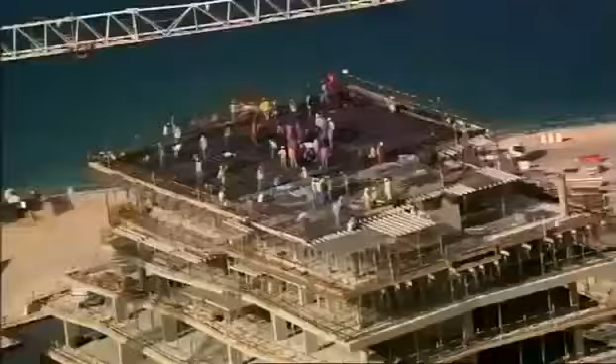Abu Dhabi, the richest city on the planet. It wants to join the City Super League and is undertaking an incredible transformation, building this extraordinary skyscraper, Aldar HQ. Nothing like it has ever been attempted. It'll be a race against the clock. Will this megastructure push even Abu Dhabi to the limit?

Abu Dhabi is in the midst of a construction boom. It's the largest of 7 sheikdoms known as the United Arab Emirates. Its capital, also called Abu Dhabi, is the richest city on earth. Its ruler, Sheikh Khalifa, has a cool $875 billion in the bank and an audacious spending strategy to match. He wants to transform the skyline and compete with the international elite of London, New York and Hong Kong.

But this is not the first time the Emirate has stood at the crossroads. Just decades ago, Abu Dhabi was a desert backwater, until the discovery of oil in 1958 brought unimaginable riches to its ruler, Sheikh Zayed. As the petrodollars flowed in, he converted the shell houses into high-rise, and the traditional way of life was swept away.

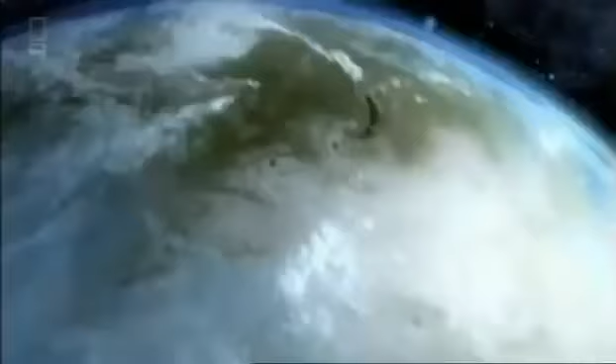To put Abu Dhabi on the world map, fledgling property developers Aldar plan a whole new micro-city, Al Raha Beach. It's an ambitious proposal. At 11 kilometers long and almost a kilometer wide, this city on the sea will be the biggest project ever attempted in Abu Dhabi's history. Mohammed Al Mubarak is in charge of delivering this audacious development. The vision of their highnesses and the vision of Aldar was to create this almost mini city where people can live, study, play, and work in one destination.

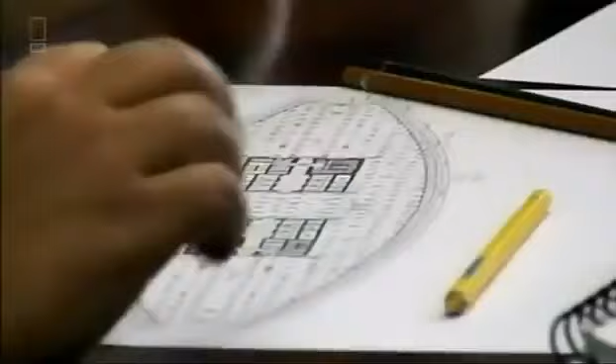Al Mubarak must attract investors if Al Raha Beach is to succeed. So to launch the project, he commissions a signature skyscraper. Creating an iconic structure on Al Raha Beach was of vast importance on basically putting Al Raha Beach on the world map. Al Mubarak sets Lebanese architect Marwan Zgheib the task of designing an icon that raises the stakes even higher. The building will become Aldar's headquarters in the heart of their colossal development.

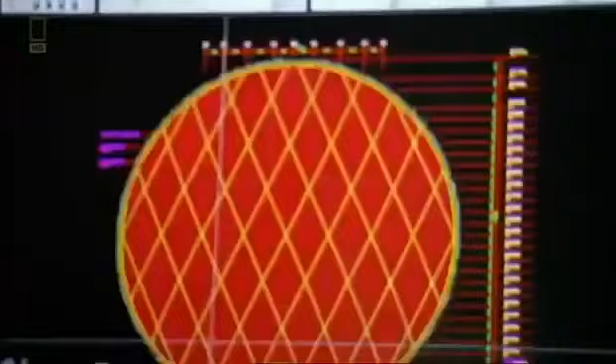But creating something new in a land where the iconic is the everyday won't be easy. Neighboring Emirate Dubai has taken center stage with a number of headline-hitting projects. The world's tallest skyscraper, Burj Khalifa, the Palm, and the World, and the emblematic Burj Al Arab. To stand out from the crowd, Zgheib knows he must redefine the extraordinary. Simple can be powerful sometimes, and especially in architecture. You can see it since the pyramids of Egypt. Most of the iconic buildings are very simple buildings.

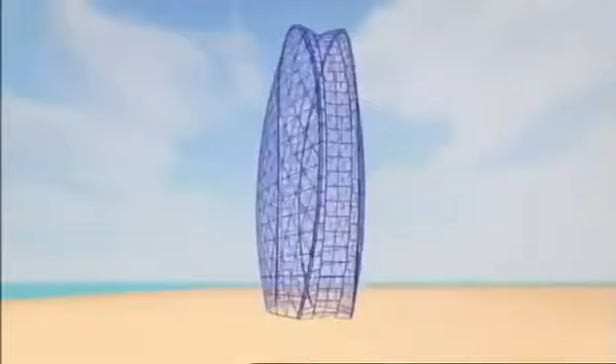But it isn't until Zgheib is relaxing on a plane that he has a brainwave. But I couldn't sleep, so it was a moment of relaxation, you know. And then the idea came, simply. So I took a pen and I drew it on a sketchbook. The design is simple but daring. A round skyscraper taller than the Statue of Liberty, with a curved glass skin covering the area of 4 football fields. To be honest with you, the moment I imagined it, I knew it was a winning concept. I knew it was something different.

In fact, the design is so unusual, Al Mubarak initially doesn't know how to react. When I first looked at the MZ design, I was a bit confused in the beginning, to be honest with you. I felt like I was looking at a comic. I felt that this was a flying saucer and basically it landed on Al Raha Beach. And I just kept on staring at it for like another 15 minutes. And after 15 minutes, I just fell in love with it.

Zgheib's design is inspired by nature. 2 giant circular curved walls of glass mirror an open clamshell. Architecture is nothing but imitation of nature. At the beginning, the idea was so geometrical, very pure. It's like a seashell. The seashell has deep meaning for Abu Dhabi with its seafaring heritage.

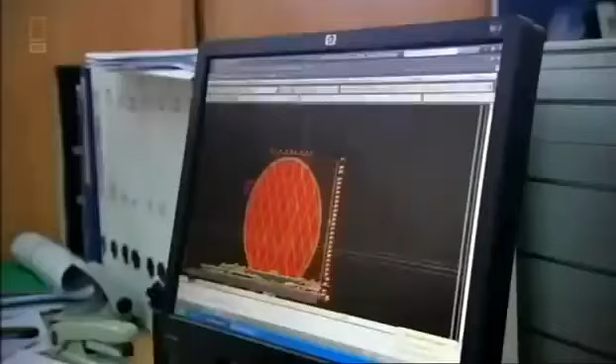But a circular design poses a problem. Just like a coin that stands on its edge, it risks being unstable. The circle must be balanced. So Zgheib turns to some very old-school geometry. The real challenge of the circular facade was to find the 2 points where the building should pose on the ground. And for that, I had to go back to one of the oldest rules in architecture, proportion. When you have a circle, you can divide it into a pentagram.

And that pentagram, in fact, is a representation of the cosmic body of the human being. So you can put a man in that pentagram, the man and the universe. So the pentagram will define the 2 points of the circle where the facade will lay on the ground. And this will create the perfect balance.

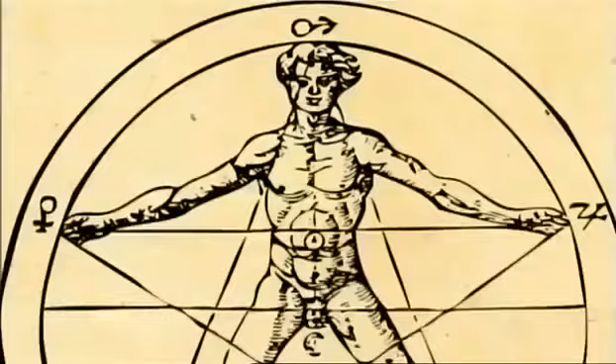It was the same thinking that led 16th century philosopher Heinrich Agrippa to draw man as a pentagram inside a circle, and has helped architects to proportion buildings for centuries. But it's not the skyscraper itself that poses the first major challenge. It's the proposed site. They wanted to show me the site, but all you can see was the sea, nothing but the waters.

Unbelievably, the solid ground required for Aldar HQ does not yet exist. The desired location is 700 meters out in the Persian Gulf and 8 meters underwater. New land must be created. Over 3 million cubic meters of sand must be found. Surely a simple task with Abu Dhabi's endless desert dunes.

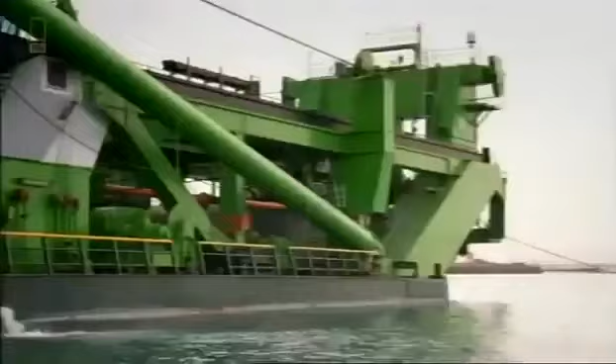But desert sands are too fine to build with. The land would just slide into the sea. Marine sand is needed. Its larger grains help it stick together, creating the perfect base to build on. Dredging sand from the seabed is one solution, but fortunately, the last sheikh has already done the job for them.

Whilst cutting a shipping channel in the late 1970s, Sheikh Zayed created an island of discarded sand. Luckily for the engineers, it's just across the water, so they decide to move all 20 million cubic meters of it. A fleet of cutter dredgers eat their way into the island. These are no ordinary dredgers. It takes an enormous claw layered with 48 reinforced steel teeth to slice through the hardened sand.

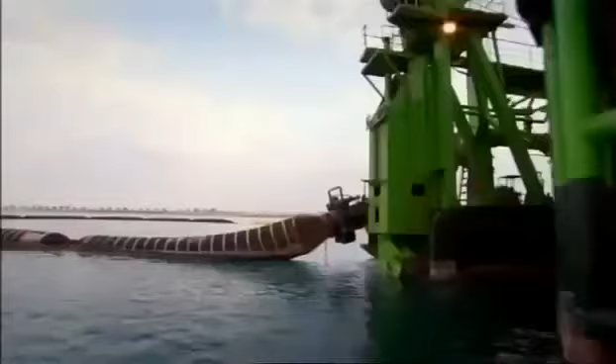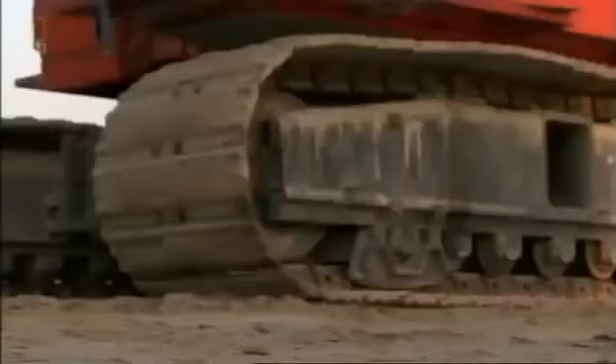The sand is pumped through a floating pipe to the construction site. Here, excavators toil 24 hours a day to flatten the virgin ground. After 8 months, the land for Aldar HQ is fully formed, and with this, the first major problem overcome. Now, engineers must somehow turn Marwan Zgheib's radical design into an engineering blueprint.

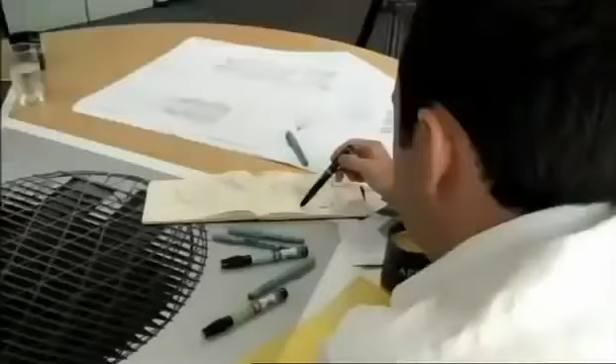Aldar want their skyscraper completed by an astonishing deadline. In just 30 months' time, the eyes of the world will be on Abu Dhabi when it hosts its first Formula One Grand Prix. The racetrack will be on its own designated island, complete with hotels and theme parks. And Aldar are building the lot.

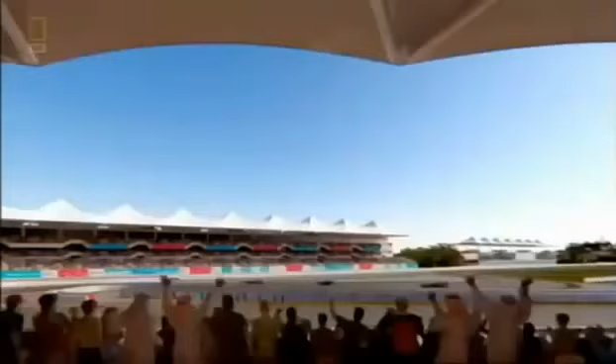The international press and tens of thousands of visitors will descend on the city. It's the ideal opportunity for Aldar to showcase their new HQ. But to stand any chance of meeting this target, the team will have to pull out all the stops. Just 1 month after design has started on Abu Dhabi's round skyscraper, the construction team arrive on site to begin foundation works.

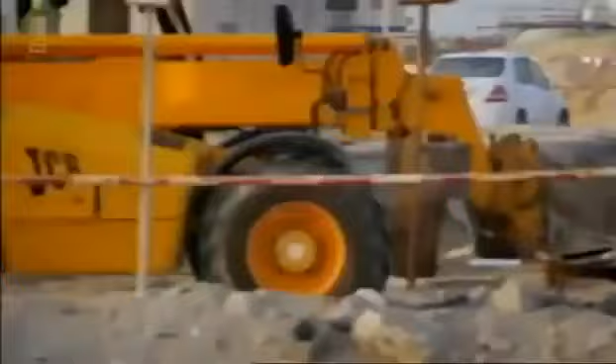For construction manager Miles O'Sullivan, the schedule is a shock. With the design not complete and being told you're going to pile in 1 month, almost crazy. But it's not just the first deadline O'Sullivan has to worry about. Aldar HQ's round curved shape presents an enormous sail-like area when wind strikes. Wind tunnel tests must be done to prove the foundations can take the strain. But the results won't be back until work has already started.

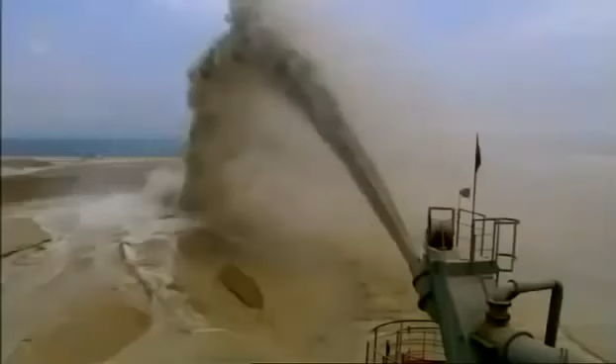Abu Dhabi is regularly hit by high-pressure winds that sweep in from the Persian Gulf. But building Aldar HQ so close to the sea will put the foundations under another kind of pressure. Digging for Aldar HQ is very similar to digging here in the sand. As you dig down, you'll get to see the groundwater starting to surge through the sand. And in fact, it's that groundwater coming through the sand here that's creating the pressure and obviously creating the issues for us when we do the construction.

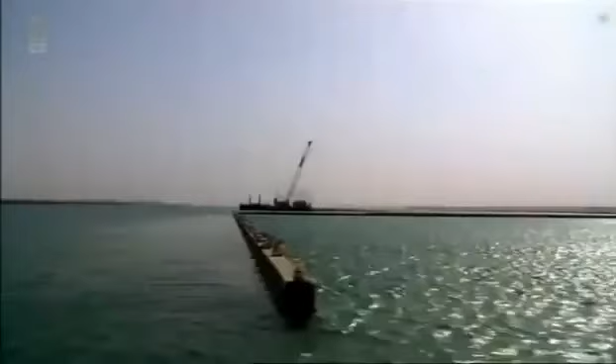The upward pressure of the water and the loose sand pose a problem for foundation construction. Before excavation can begin, the team must build a solid barrier called a diaphragm wall or D-wall. It's a concrete barricade formed of interlocking panels which socket into the bedrock and reach 16 meters below the surface. The D-wall holds back the loose sand and the surging seawater, ensuring the ground inside the barrier can be removed.

These areas here, what are these? Sumps. The D-wall must be built before the foundations can be laid. But with the blueprint above ground a work in progress, the team can only hope that over-engineering the foundations will make them strong enough.

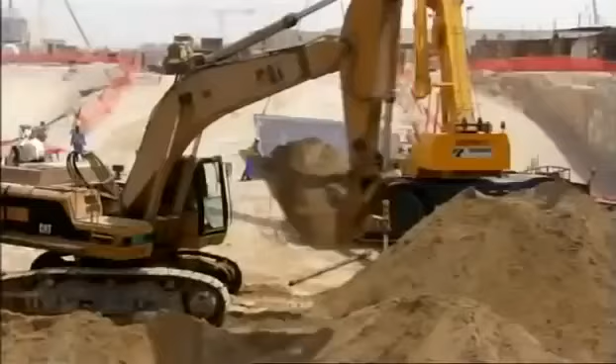The design calls for about 400 concrete piles that work in 2 ways. Half of the piles rely on friction with the ground to secure the structure to the rock and sand below, whilst the remaining piles drive deeper into the rock to dissipate the building's immense loads into the ground. On site, D-wall construction begins. It's the same process ongoing at this Abu Dhabi construction site.

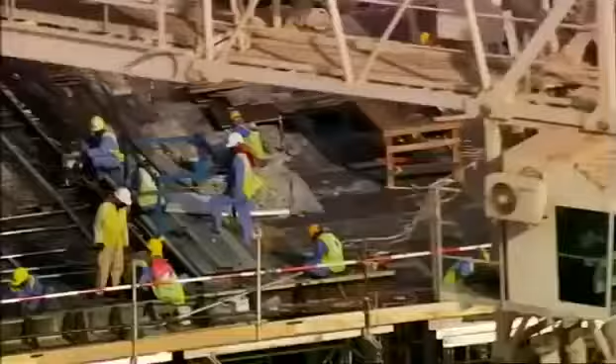Until recently, Al Raha beach was just a vision for Aldar's Mohammed Al Mubarak, but the dream is slowly emerging from the sea. Seeing that land come up, seeing the amount of work and the amount of staff we had on the ground to make sure that was going to be done, that was like watching Rome being built.

The D-wall and concrete piles create a firm foundation upon which to build Aldar HQ. But the force of the sea pushing up through the sand still poses a threat to the skyscraper. A great way of demonstrating the problems we faced at Aldar HQ with the groundwater is in imagining that this bottle here is Aldar HQ.

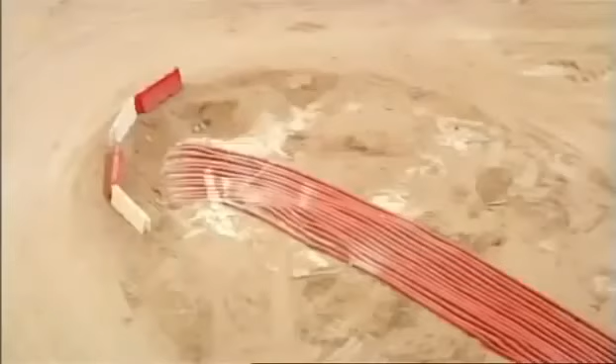And as I push the bottle down, you'll see forces are exerted on my hand. And in fact, that's the groundwater trying to push the building out, trying to push Aldar HQ out of the building site. To keep the site dry during construction, water is sucked out of the sand and pumped out to sea. But that's only a short-term solution.

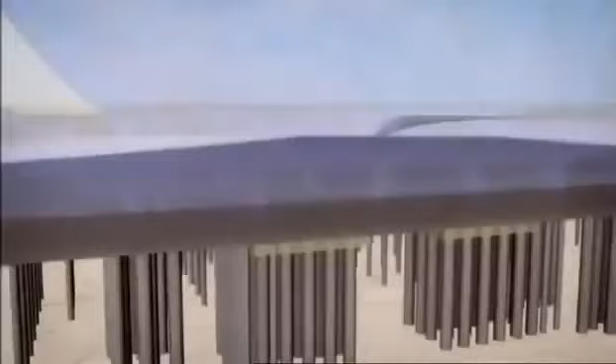To protect this skyscraper in the long term, the team need an extra defense. It's a giant slab of concrete called a raft. It creates a barrier against surging water, stops the piles from punching up through the building, and acts like a snowshoe to evenly distribute Aldar HQ's 59,000-ton weight into the ground.

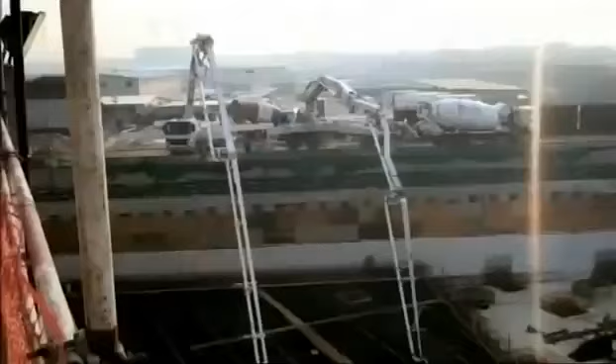Raft construction for Aldar HQ is 12,000 cubic metres of concrete, which is a 30,000-ton structure. It's a huge element. With 2,000 truckloads of concrete to pour, it's a job that continues into the night. But engineers are just getting to grips with the severe forces that will affect the piles.

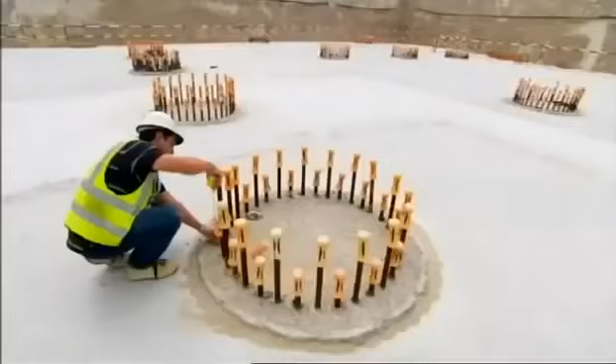The unique shape of the skyscraper will capture wind like the sail of a yacht. There are no guarantees the foundations will be strong enough to cope with the loads. The advanced construction works had to commence so quickly that we didn't have time to do the wind tunnel test. It was important that we did one, primarily because this is a unique shaped building.

Gibbons calls upon wind engineer Roy Denoon in Colorado, USA. He puts a scale model of the HQ through its paces in his high-tech wind tunnel. Right at the start, Craig Gibbons actually called me and said, "We've got something really unusual coming up. Can you take a look at it and give us your first best guess of what the wind loads might be? Give us some guidance on how to get to some loads for the foundations, because this is running on such a fast-track schedule."

Knowing that Gibbons is already building the foundations, Denoon wastes no time in firing up the fans. If the tests reveal the wind loads are higher than predicted, the foundations already in the ground may have to be redesigned. To be putting in the foundations before we could finish the wind tunnel testing, that always gives us a little bit of cause for concern. Denoon is right to be worried.

He knows how high-altitude wind impacts on very tall rectangular skyscrapers. But Aldar HQ's lower height means another type of wind is the threat. When we look at the really extreme wind speeds in the Middle East and in this region, we find that the highest, what we call gust wind speeds, the short events, are caused by thunderstorms.

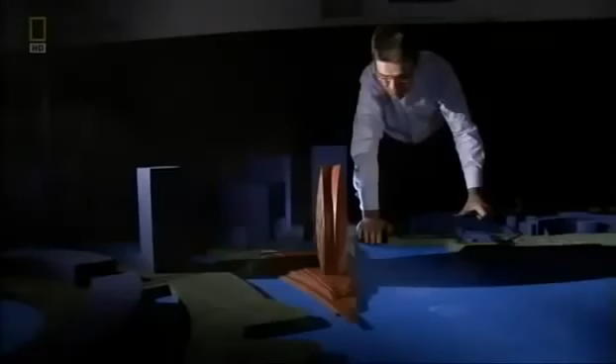Fortunately for Gibbons, it's Denoon's jokes that have no foundation. And I got the results back from the wind tunnel test, and they were within an absolute whisker of my early predictions. And I was just delighted by that. I couldn't wait to get on the phone. They were pretty relieved, I think, because I think they'd been sweating on it a bit. It was a great relief to know that Roy was just winding me up, and that in actual fact the wind loads were very much in line with what our expectations were.

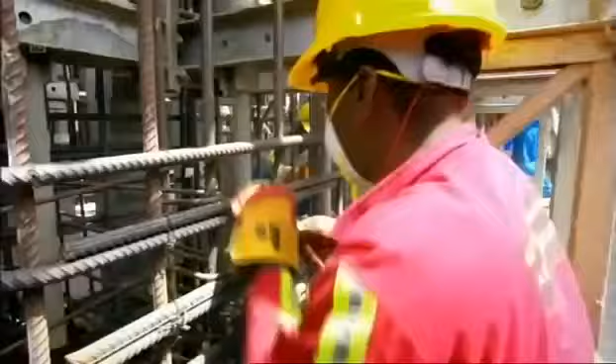The results of the wind tunnel test are great news, but the relief is short-lived. Now the structure needs a super strong backbone or core. But again, conventional building won't fly with this design. For Aldar HQ, one core wasn't enough. We needed 2 cores, in fact, to take all the loads down into the structure. Aldar HQ needs 2 concrete cores for extra stability. The twin spines rise a full 125 meters from the concrete slab to level 23. Reinforced with 6,500 tons of steel, these cores will transfer the loads into the piles. But to channel these forces safely, the concrete must be cast without any flaws.

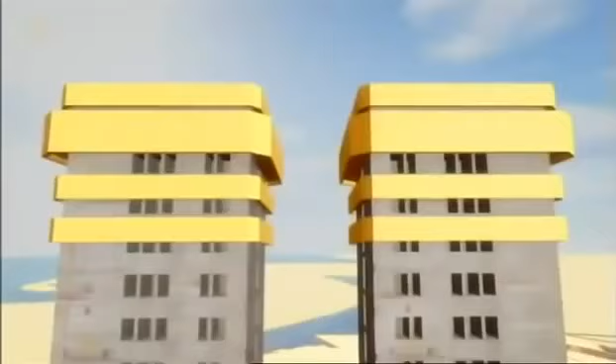They need a way to build the cores as 2 single pieces of concrete. The answer? To slip form. It's a clever way to build big concrete towers. Liquid concrete is poured into a giant mold, which forms the shape of the structure. The mold slowly climbs up the core as it's cast, forming a single concrete tower without any joins. Seamless concrete will ensure the HQ's cores are strong. But these 125-meter backbones must be built in only 6 months.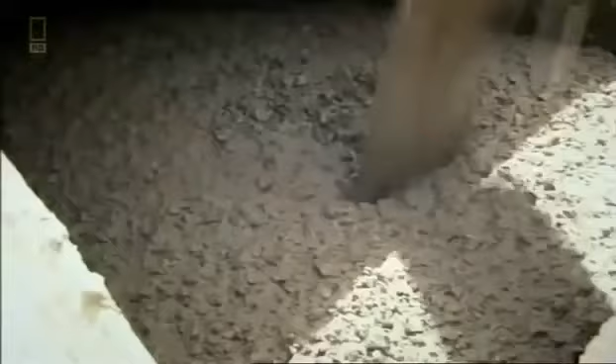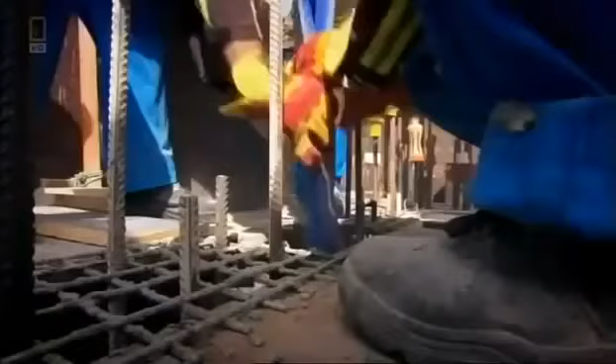It's the same process ongoing at this Abu Dhabi construction site, led by the Aldar HQ team. We are calculating how much per hour we need to climb, and then how much concrete we need to place in every hour. Slip form is fast, but on this schedule it's not fast enough. O'Sullivan has a trick up his sleeve to speed up construction. We set a challenge to both cores, who could get up there first. The teams battle to reach each level before the other. The cores grow meter by meter under a constant cycle. The concrete is released and poured around the steel reinforcement. Hydraulics anchored to the structure raise the mold or shutter so that the next layer of concrete can be poured.

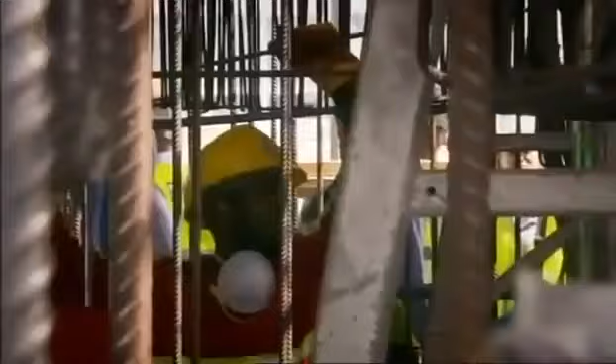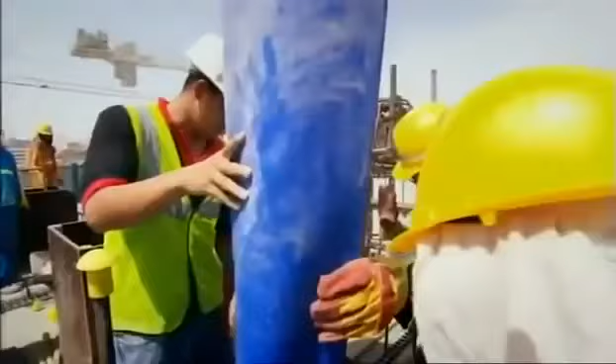The manpower is a key focus because slip forms are very labour intensive. You need to make sure that the guys are on deck, they're there at the right time, they're doing the right works. 4 months into core construction, the 2 teams are neck and neck in the race to the top. Core 1's team leader keeps a close eye on Core 2's height. It's been my benchmark, so if I'm doing better, I'll be ahead of them. There are a lot of pressures. My boss is telling me, do this, go up, go up, go up. But it's good, the pressure is good. Core 2's leader also feels the strain. I'm working 24 hours today. I try to finish earlier than the other core.

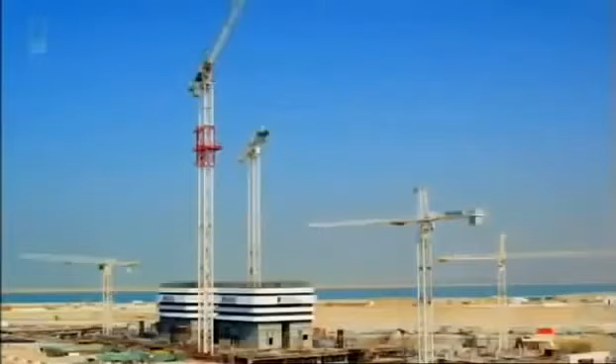Every month, the builders pour enough concrete to fill 1.5 Olympic swimming pools. But the teams aren't home and dry yet. There's still a challenge to finishing. Cores are renowned for going up quickly and sometimes having problems, so there's a lot of coordination effort that goes in to make sure that they do go up on time. We had structural steel elements to cast in. We had crane connections to get right. After just 6 months, the 2 cores are approaching the top. Core 2 is only a meter or so behind, but Core 1 push ahead to victory. Core 1 won the race. It's really good to know that we're on top.

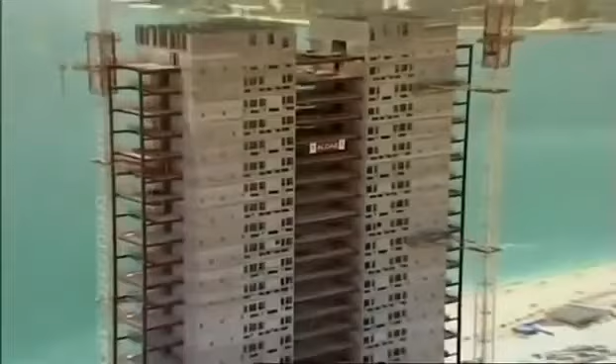For O'Sullivan, the contest to build the cores in record time has paid off. A lot of planning goes into the cores. To see it come off, a fantastic feeling. But it's only a stepping stone, the core construction. There's a lot more to go on. The team have so far overcome the obstacles to bring Aldar HQ to life. But now they must face their most complex challenge to date. 1 year in, and Abu Dhabi's radical skyscraper is beginning to take shape. But with only 19 months to the deadline, the engineers must crack how to build Aldar HQ's vast external shell.

The design demands a heavyweight shell to support its wide girth and survive huge wind loads. But the architect stipulates open office space, floor-to-ceiling windows, and panoramic views of the Persian Gulf. In the United Arab Emirates, the shells of rectangular skyscrapers are built with concrete. But the geometry of Aldar HQ's shell is so complex, it must be built with the precision of a Swiss watch to fit together. On this scale, achieving millimeter accuracy with concrete is practically impossible.

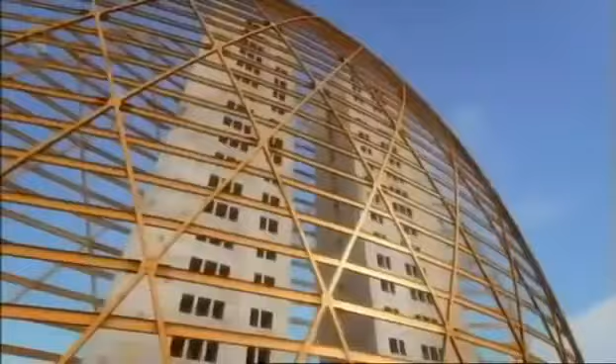The answer? A specialized steel exoskeleton called a diagrid. It's a muscular but slender steel frame that will form the HQ's unique shape and will channel forces through its high-strength beams and joints into the cores. Steel is very strong as a single element, but meshing them all together gives us this added strength and also allows us to make these rather unusual shapes.

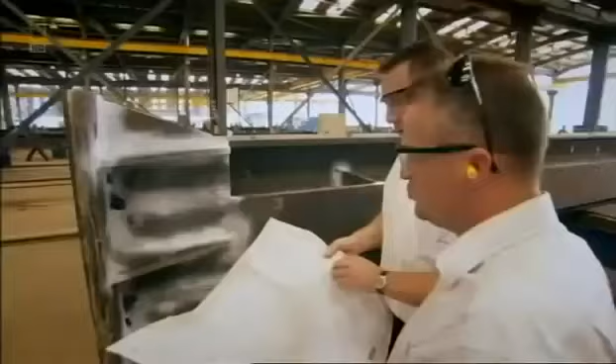The geometry of the building presented a significant challenge to us, but the other challenge was that a diagrid building, or buildings using this diagrid system, had never been built before in Abu Dhabi and the UAE. Let's have a look at it if you don't mind. It'll take expert steel fabricators to pull this job off. When we first seen the design, it was something that we knew we had to put our most experienced guys on it. The structure's very, very complex.

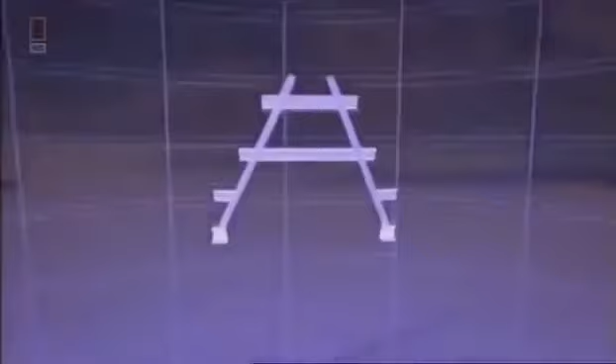The army of fabricators work in shifts around the clock to cut and weld 2,500 tons of steel. The factory is building a series of A-shaped steel sections, weighing up to 30 tons each. They will connect together to form the structure's signature curves. But if manufacturing these giant A-frames is not a big enough job, lifting them into position on site will be a major challenge.

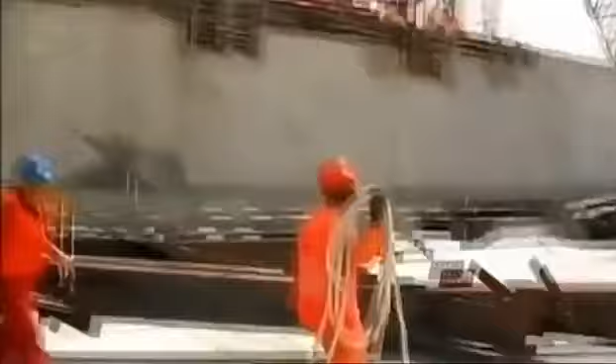Great to see the steel arrive for the main diagrids, the main columns to the structure. Huge sections. The thought of actually starting the steelwork some 18 months after we started the job, fantastic. But excitement of the first A-frame delivery is soon replaced with trepidation. Lifting these monsters will be a precision job, and tensions run high.

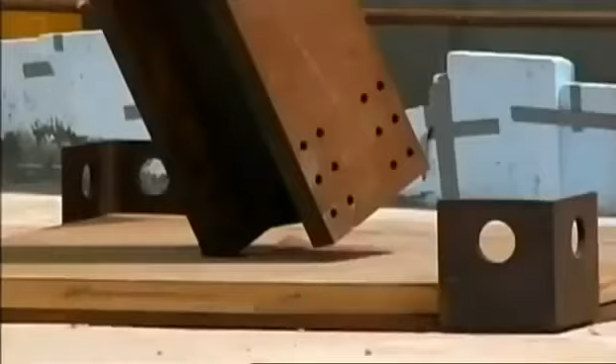When we rigged the first A-frame up, you've got to put all the chains on it. It would take maybe an hour to rig it up, and everybody's then thinking, I hope this is going to work. Everyone is on tenterhooks. Now is the moment of truth. The A-frame is lifted off the ground. There was a big ah from the crowd when it went in. The first exoskeleton section is finally bolted to the base plate.

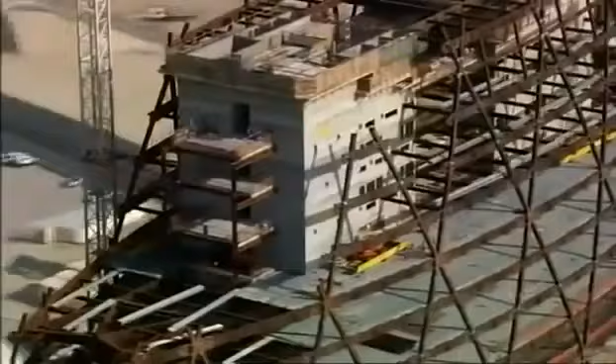To see one go in, an amazing feeling. First A-frame up, again a milestone achieved, but then a lot more to go. Another 99 A-frames must be fitted to form Abu Dhabi's unique skyscraper. The handover date is now just 19 months away. So the team must now focus on the HQ's interior.

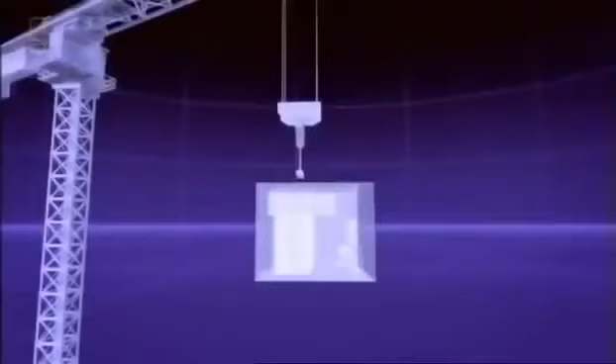The structure needs an alarming number of restrooms, 85 in total. This is no weekend DIY job. It'd take an army of plumbers and time the schedule cannot spare. So to fast-track the task, the team innovate again with prefabricated washroom modules or pods. A pod is a factory-made restroom, complete with lavatories, basins and mirrors, ready to plug into the building. The team plan to lift these 12-ton pods by crane and lower them into the cores like a giant game of Tetris.

Construction is a finely tuned sequence. The pods have to be in before the exoskeleton blocks access to the cores. Aldar must approve the design fast, but there's a problem. We produced a lot of visuals and graphics which we had signed off. Then we actually built the pod. We went to look at it at the factory and a lot of people thought that's it. But Aldar unexpectedly rejects the pod design. It's just too ordinary for such a futuristic skyscraper.

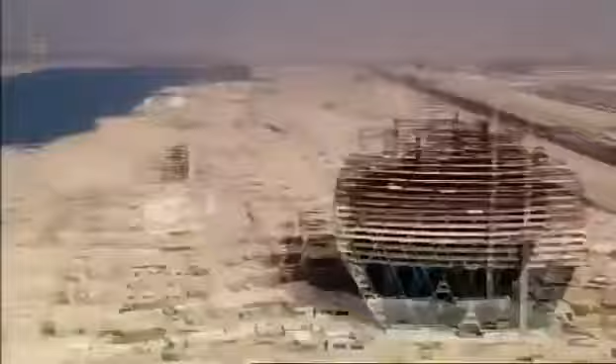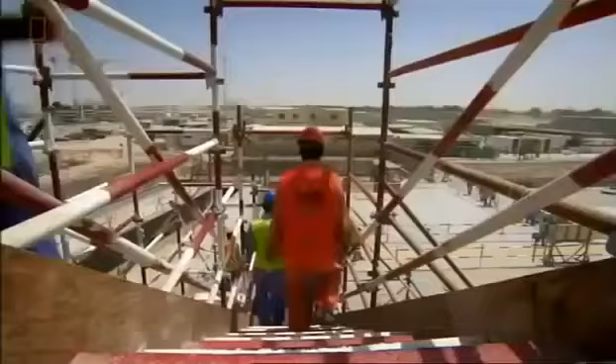It will take months to remodel, and the exoskeleton can't wait. The whole plan could go down the pan. The only option is to leave out 2 roof sections and drop in the pods later, but this has its own dangers. With zero hour looming, the team must now wrap the building's skeleton with a glass skin. And no one has ever built a glass facade like it.

The geometry of Aldar HQ is highly complex. 2 giant bowed facades cover an area the size of 52 basketball courts. A 3rd narrow surface joins the round facades like a zipper, arcing an extreme 290 degrees from one side to the other. But curved glass like this doesn't exist. The engineers need another plan.

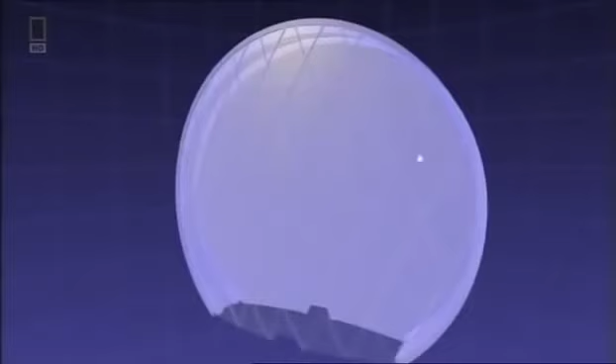The secret to covering a curved surface with flat glass is its shape. Square glass isn't an option. Squares can only bend in one direction at a time without distorting. Aldar HQ needs triangles. They can pivot on 3 axes and seamlessly join with their neighbors. To form these complex curves, it'll take 25,000 individual panes.

But before glass production can begin, the team must know what wind pressures it will face. It's back to wind engineer Roy Denoon, who must test the design in his wind tunnel. When we first saw the design, we knew there was some potential for some quite high glass design pressures. If you under-design a pane of glass, then it will be sucked out the building. The large facades are most likely to cause trouble.

The biggest loads on the overall building are the winds coming flat into the wide face, so it's capturing it almost like a sail. The wind comes into the centre and spreads out around the building, and where it separates and splits away from the building around the edges, that's where we see the largest pressures. The pressure is like a big SUV hanging off the outside of each panel.

But that's not all Denoon's test reveals. The circular shape of Aldar HQ creates another problem. When we initially saw the design, the sharp edges threw up the warning flag that said, look, we can get some pretty large pressures here. Where the wind hits the edge of the narrow strip of glass, it spirals in on itself, creating a vortex.

You see this recirculation of the flow. It separates away, and you get this little bubble on the surface where the wind isn't hitting, and then it comes back in to meet the surface again. That's typically an indication that that's where your highest design loads are occurring for your glass. And that's very, very strong suction force is what that little bubble means. To stop wind sucking glass out of the HQ, each pane must be beefed up with thicker glass and a stronger frame.

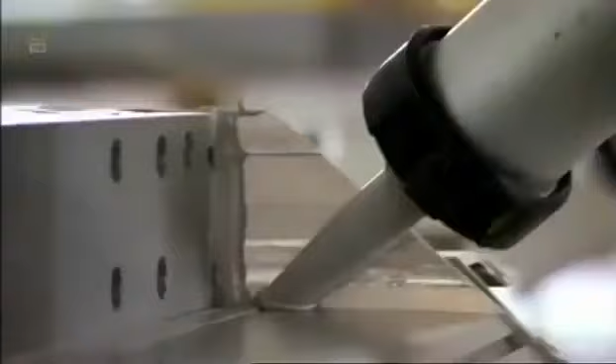But that does nothing to limit the scale of the job ahead: installation. You talk about 25,000 pieces of glass. To do that for the building in 10 months, it's a monumental effort. It's a constant battle, making sure that you get the glass to site. But having the glass factory on site is a lifesaver.

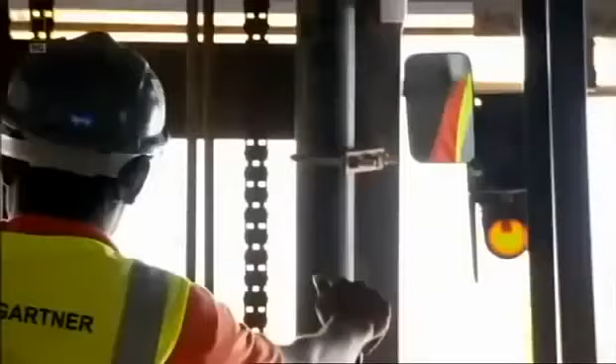It made it easier for the site to actually call up on glass. Once they are installing the panel, they ran out of glass, we're immediately on the phone. Hey, we need more panels over there, so we got them on a truck, and 5–10 minutes later they were on the site. The glass factory sends the panels to the site by truck, and the panels are lifted by crane up to the installation team.

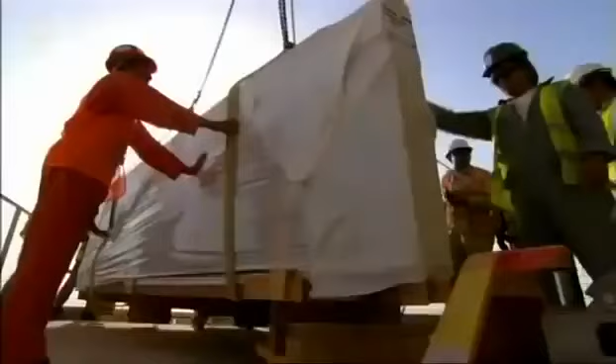The constant pressure was the program. The glass is pulled onto the floor plate, but it takes a team of 8 specialist riggers to install the panels. Probably the hardest thing was the sheer volume that had to be installed. Fixing glass on a curve at this height means the panels have to be swung out from a platform that hangs out of the building.

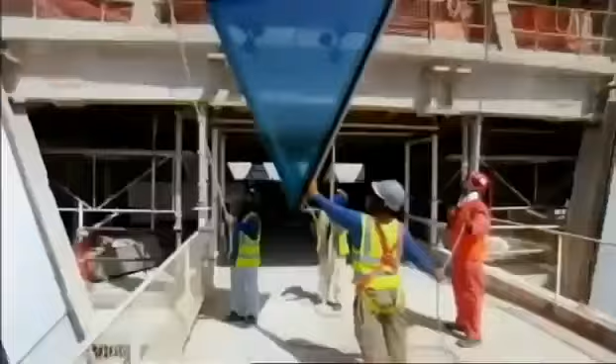It should be easy, but then this team have Abu Dhabi's wind to contend with. The wind here can just blow in from nowhere. It caused us no end of problems. The glass would start to revolve and spin. We would get a choice whether to lift it, bring it into the building, put it down, or to put it straight back down on the ground. They were decisions that had to be made on the spot.

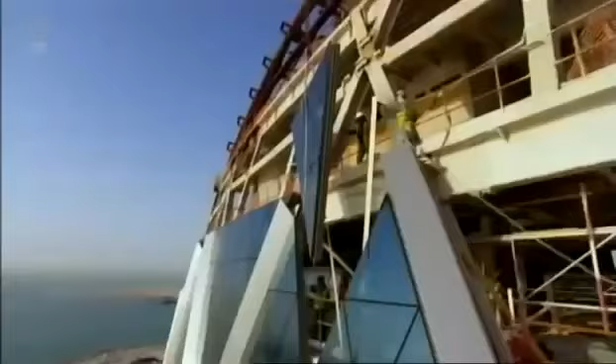And you don't want a large panel coming down from 20 stories. Just contemplating that, it doesn't bear thinking about. This glass panel makes it into position in one piece. But the team have another 29 to install every day if they're to meet their targets. We got it up to 30, 32 on average, and I think the best day was over 40.

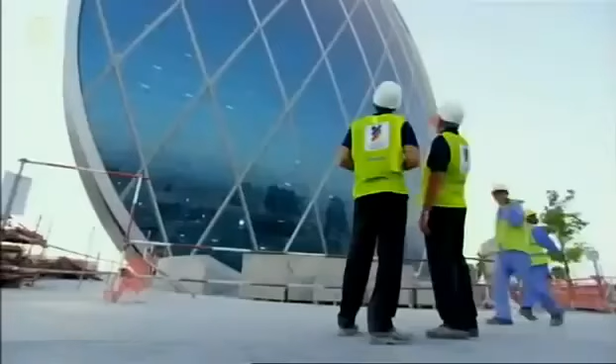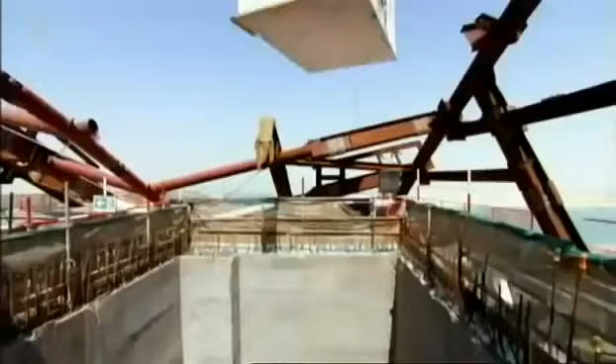The pod drops are quite quick. We hook them up, we take them up the 140 metres to the top of the tower crane. The pod can now be lowered into the core shaft. It's a tight fit with just 75 millimetres of clearance.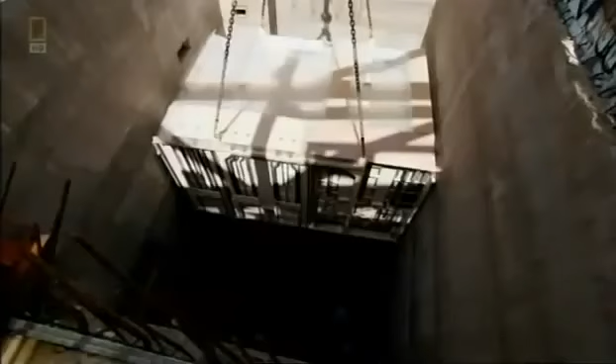When I saw the first pods in, it was a relief that that saga was over and we'd actually managed to achieve what the client wants. The pods are on the move, but the long delay has serious consequences. Finishing the exoskeleton should be a straightforward task, but the incomplete steel roof has sagged out of shape.

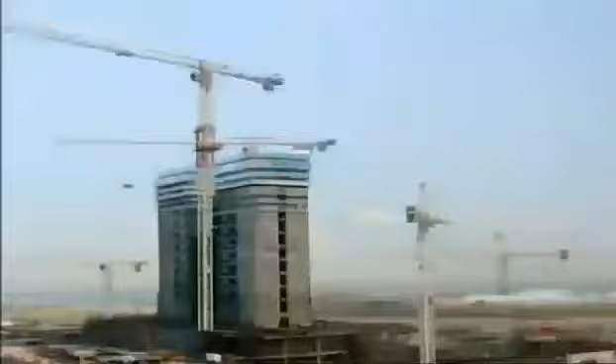Eight months from the deadline, and the world's first spherical skyscraper is fast approaching completion. But with the end in sight, construction hits a serious snag. The delay in fitting the washrooms into the cores has forced the team to leave the roof arch open, causing the steel to slouch out of shape.

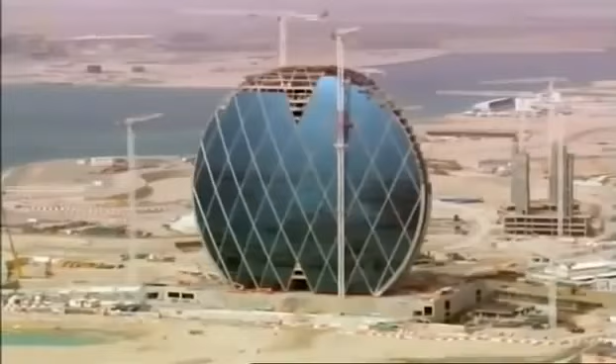The arch of the HQ's lightweight roof is the key to its strength. Its curves evenly distribute the forces down into the foundations. But if any elements of the arch are missing, the forces cannot flow away. The roof will sag under the weight. To discover how serious the slump is, the steel is surveyed.

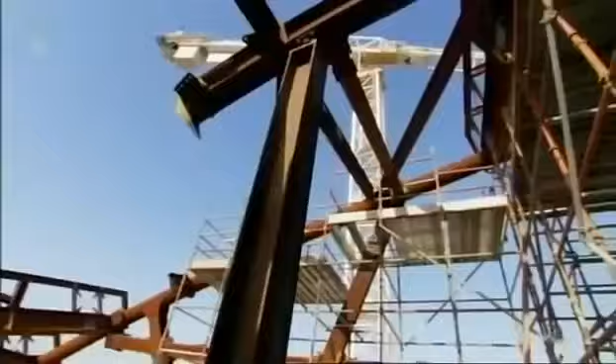I made a phone call to our site supervisor, Bob, and asked the question of what the actual sag was recorded, expecting it to be around about 50, 60 mil. When we got the figures of 150 millimetres, I was a little bit shocked. With a building that relies on precision engineering, a 150 millimetre sag is a huge problem. The roof will not slot together. The brackets to connect the remaining 40 glass panels will be out of alignment.

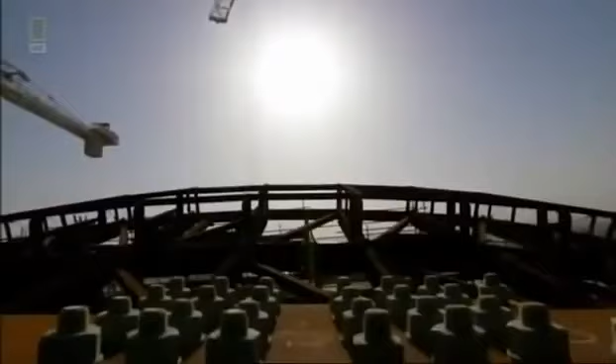There is no time to redesign. The team have to somehow make the roof steel fit together. The only way is to lift the entire roof into position, and it weighs a staggering 200 tons. Even for experienced steel engineer Bob McPhee, this is a serious undertaking. I hate it when you start waking up thinking about your work. I've never liked to do that.

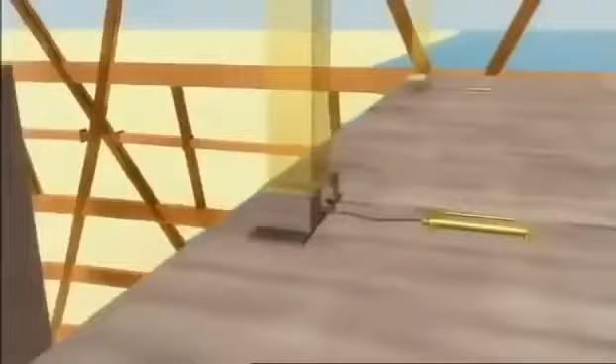To lift the roof arch, 2 hydraulic jacks are positioned on top of a load-bearing wall, carrying 80 tons of weight into the core. 2 more jacks are propped with 16-meter-tall steel columns and channel 40 tons each into the concrete floor of level 23. The props are packed with steel slabs to hold the roof in position as the jacks are raised.

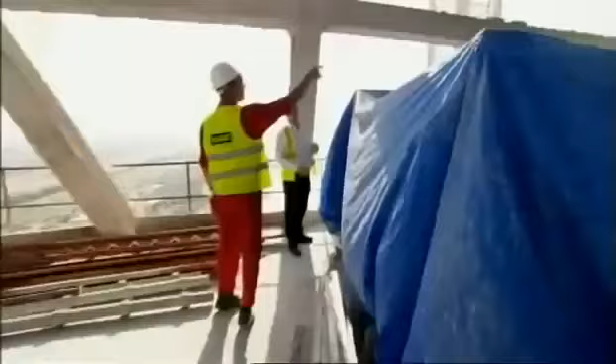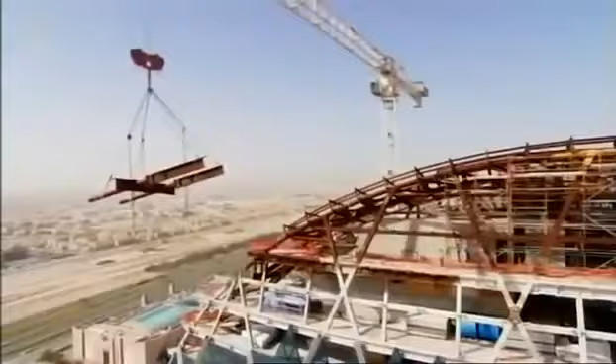The roof is moving firstly a couple of millimetres, then 5, then 10, then gradually into its position, 20, 50, 100, and then into its final position, 150 millimetres. The entire roof is raised by a whopping 170 millimetres. The slumped arch is finally in the right position. All that remains is to lift the last steel section. It's a tight fit. With a millimetre to spare, the roof is finally complete.

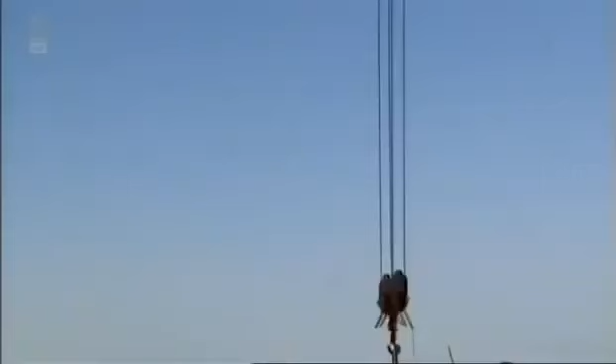With just weeks to spare before Abu Dhabi's first Formula One motor racing spectacle hits town, all of Aldar HQ's 25,000 glass triangles are in position, except one. The glass installation team lower the pane inch by inch. No one wants to be responsible for shattering the last sheet of glass. It's a defining moment for the team. Finally, the last pane slots into place.

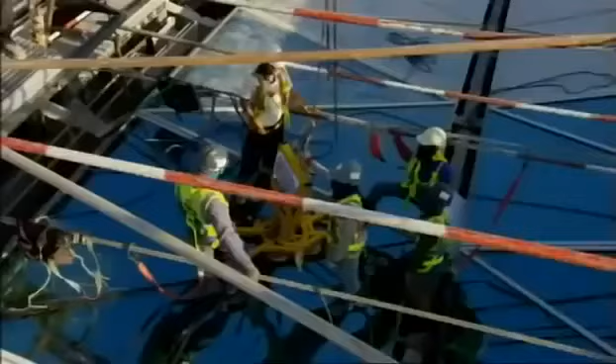Ecstatic. And actually see the last bit of glass go in. Amazing feeling. Hopefully the guys here feel the same way, and you know, I'm just overjoyed. Against all the odds, and in just 30 months, the team have fulfilled their brief. An engineering triumph. This is Aldar HQ.

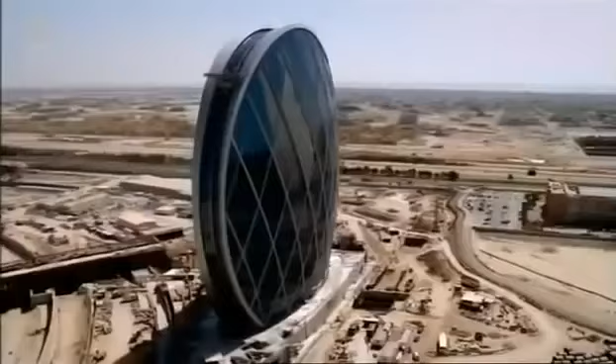Mohammed Al-Mubarak fell in love with an extraordinary idea. But will the building match his high expectations? It's really a work of art. It's a stunning building. To me, it feels like it should be in a museum. The space is unbelievable. It's a really colossal building. When you come up front to it, it's even bigger than you even imagined. And for it to come from paper to that, it's great.

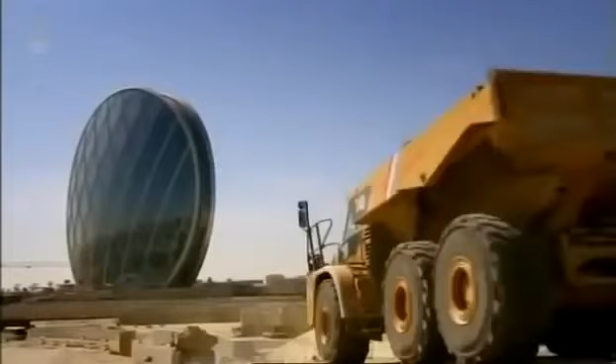Already an icon on the Abu Dhabi skyline, Aldar HQ should lay solid foundations for the future of Al Raha Beach. Architect Marwan Zgheib is delighted to see his concept sketch come to life. The building is more beautiful than the original idea because it's real now. It's no longer a simple concept.

It's become reality. Aldar HQ is a structure that rivals not just Dubai's iconic buildings, but can stand proud on the international stage. The HQ building has really put Abu Dhabi on the world map. If you ask me today, we're not yet into the world of Singapore or New York or Paris or London. Will we get there? I absolutely believe we will.